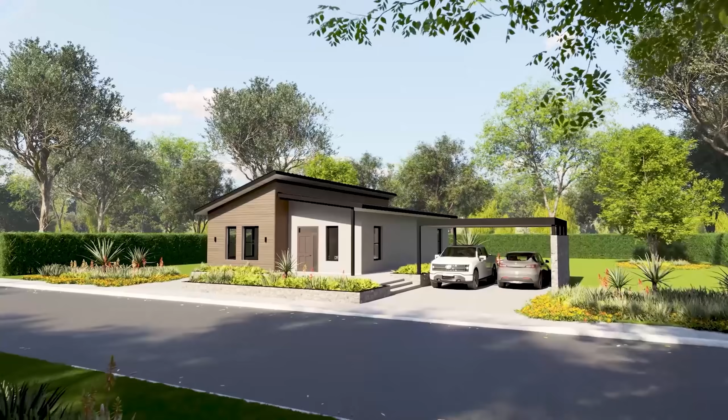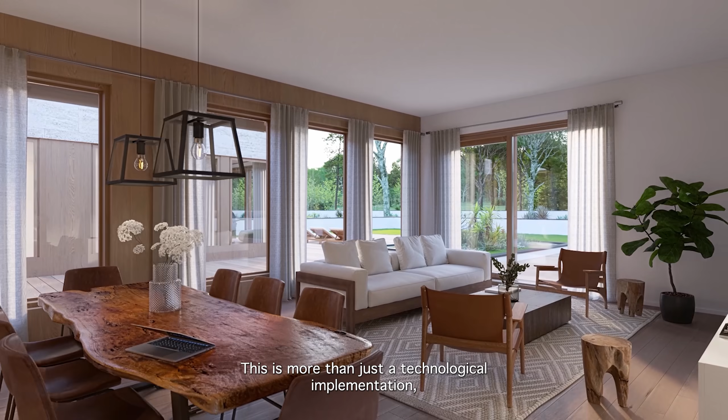I think ADMARES is leading the charge of building into the 21st century. It is an actual disruption of the whole market. We will write history with this. This is what we couldn't do a couple of years before. I mean, it's innovative, it's exciting, it's something that you want to own. This is more than just a technological implementation, it's something that is important. It's going to be game-changing.

Our background is in the shipbuilding industry, where large units typically get produced in a very controlled factory environment and then delivered to the shipyard for final efficient assembly.

That made us look at the traditional construction industry, which today still relies on building everything outdoors. A traditional construction site is usually extremely chaotic with many challenges. The biggest challenges being, first of all, you need skilled manual labor to assemble buildings, and we're running out of skilled manual labor in the world. Due to that, the cost of construction keeps rising.

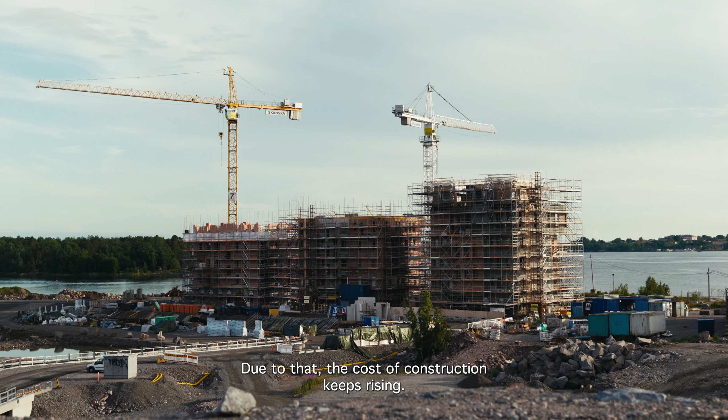On top of it, it's very difficult to control the quality when you build outdoors, because you're always dependent on weather conditions and other logistical challenges. That makes us think, why do you actually build outdoors at all? There's really no benefit. It's just something we've been used to do for the last 2,000 years. So we wanted to completely remove the need for a traditional construction site. We wanted to develop a technology allowing us to build a home in a factory like a product.

Together with our partners now, we spent 8 years on developing the technology, and we today have the technology allowing us to mass produce homes in a factory without the need for any skilled manual labor.

The key metrics for our product are takt time of 22.5 minutes per home, 80% less waste per produced home, while at the same time achieving far superior quality than anyone would get while building on site. And that labor that we have do not need to be construction labor, they can be assembly line operators who we can train in a day.

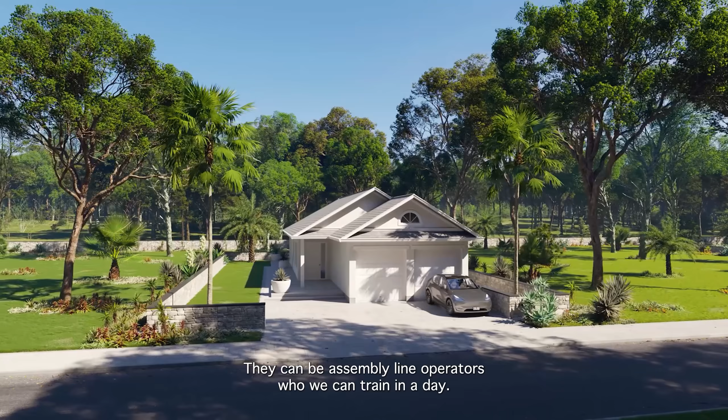Our home being a product is the key discovery in this kind of mindset. Without having a product, you cannot put it in a factory and then you cannot industrialize. That was by far the biggest breakthrough in all of this.

We had the product technology, but we're completely lacking the production technology. We had no clue how to build a factory using automation and robotization. Fairly soon after we tried to design a factory on our own, it failed miserably, so we had to get external help to figure out the production side of this.

Porsche Consulting was actually our first technology partner. Porsche came in and guided us with the concept from automotive industry using the so-called fishbone concept and how we can use pre-assembly and then main assembly and actually get very high productivity and get to a level of mass production. Everything should work smoothly, right?

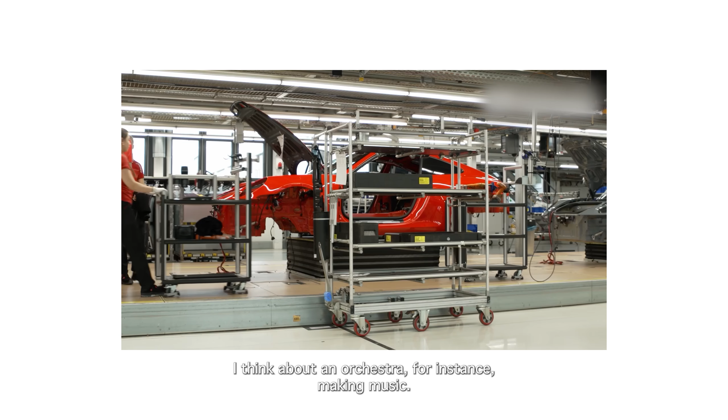I think about an orchestra, for instance, making music. Everything is working more or less in a harmonic environment and rhythm, so to say.

Well, I had this encounter with Michael Hedberg, the CEO. I found his vision very promising and very inspiring, and so we came together.

MHP's role from the beginning has been very clear. They have been responsible for designing the whole digital ecosystem, the whole digital backbone. For me, the catchphrase was that actually ADMARES was willing to build something that is revolutionary. You will have so many different competencies that you would need to introduce, like manufacturing, like assembly lines, like robotics, AI, everything which is coming with processes and organizations and operating models. Bringing that together is exactly our role.

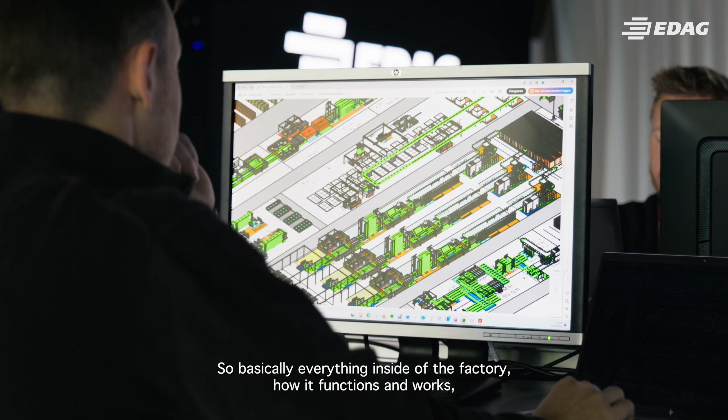EDAG took the concept and designed the whole logistics part of it, production lines and main assembly lines. So basically everything inside of the factory, how it functions and works, is something EDAG has designed. We are acting as the digital and industrial integrator in this project. So we have designed the factory's internal logistics, all the 26 production lines, including the automated main assembly line.

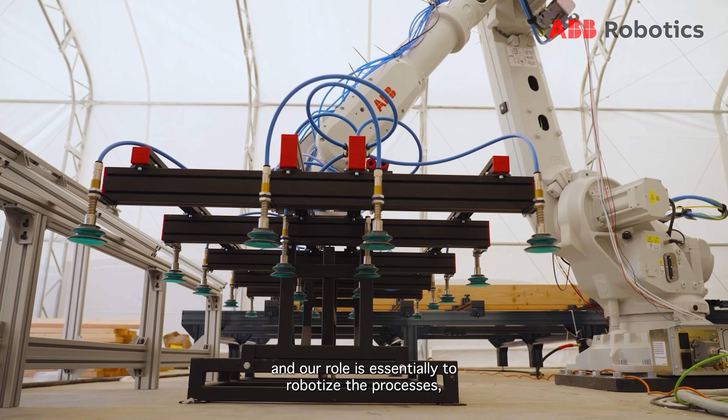We're there to help differentiate the way that home is designed with a lot of our digitalization tools, some of our electrification products, and then we're also going to play a significant role in the way that factory is designed in a digital-first way. We've been making robots for 50 years, and our role is essentially to robotize the processes to drive high levels of automation for precision and repeatability of these systems within the smart factory environment.

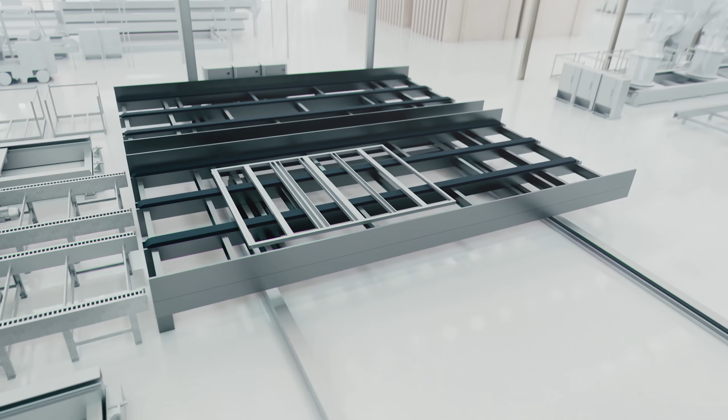The problem that we are solving actually with EDAG and with all the other partners in the project is how do we bring all those different data sources together? Because if you look at it, if you want to build a virtual representation of any kind of environment, the challenge that you still have today is that you're tapping into various different tools, that might not talk to each other. So helping our partners to tap into that with our Omniverse libraries, the SDKs behind and the frameworks, this is the core of what we're providing.

That we're providing to that project. Something that I think is crucial in order to go from PowerPoint into the reality is the logic of technological partnering. When we talk about physical AI today, there's not going to be one player who's like, and here is the solution to any kind of intelligent machine or intelligent home or intelligent production. This is an ecosystem play because there are so many ingredients.

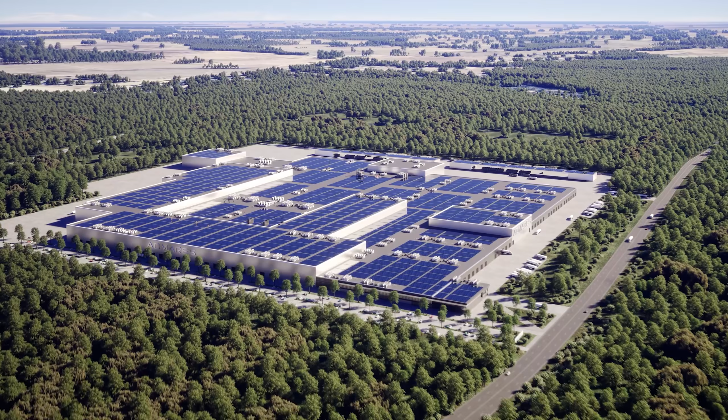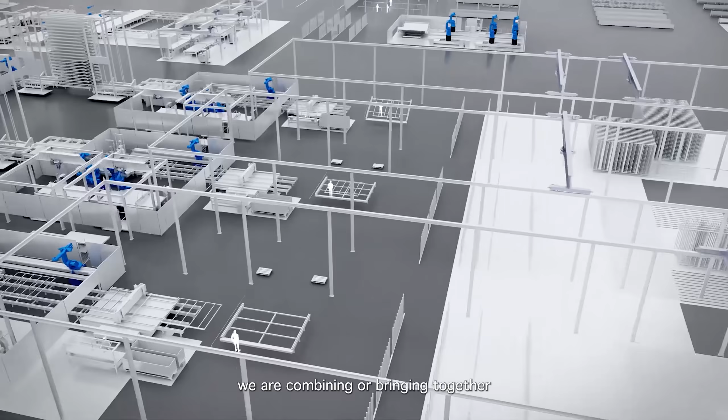EDAG, in cooperation with Siemens and NVIDIA, started to build the smart factory in a virtual world. Using our industrial metaverse platform METIS, we are combining digital twins, virtual commissioning, simulation, physical AI, and industrial implementation in a truly integrated system.

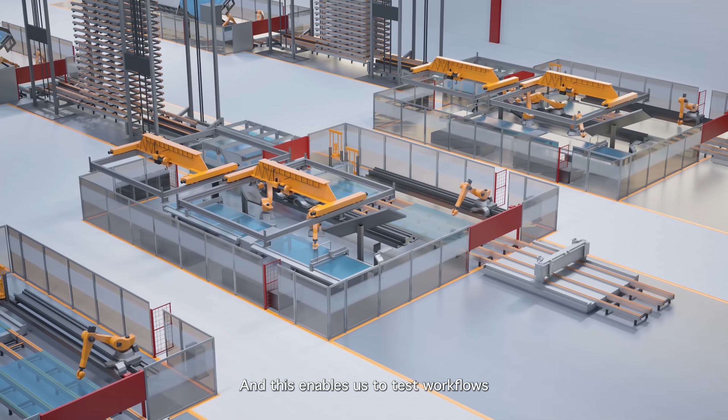This enables us to test workflows, to avoid bottlenecks in the facility, and to confirm upfront that the planned productivity will be an outcome in the physical facility.

This is a very big digital play. We're able to actually simulate and validate the factory, that it actually works and creates the productivity and takt time that we have planned before we even build the factory.

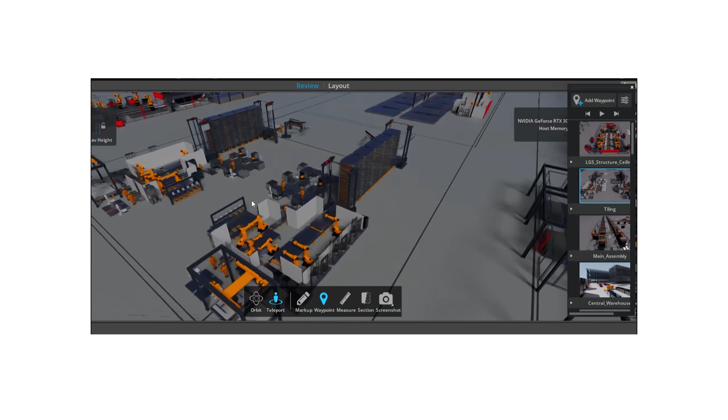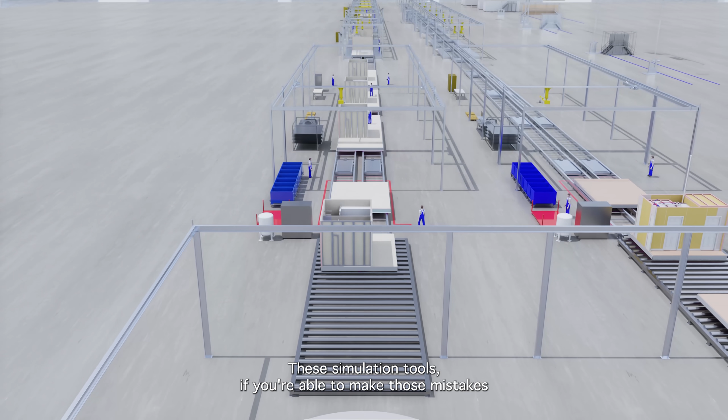It's really painful to build out models in the real world and make mistakes in the real world because it's very expensive - from concrete to steel to equipment. These simulation tools, if you're able to make those mistakes in a virtual environment, you can make as many as you want, you can iterate on that, you can anticipate, you can interpolate. There's so many things that you can do in a virtual environment.

You're not guessing at how it's going to work out. You absolutely know it's going to happen.

When you lean in on digital twin use cases for the design of the home itself, the benefit is in the homeowner that has access to the data, right? You've got a home that's speaking to you. You have a manufacturing environment that's speaking to the home.

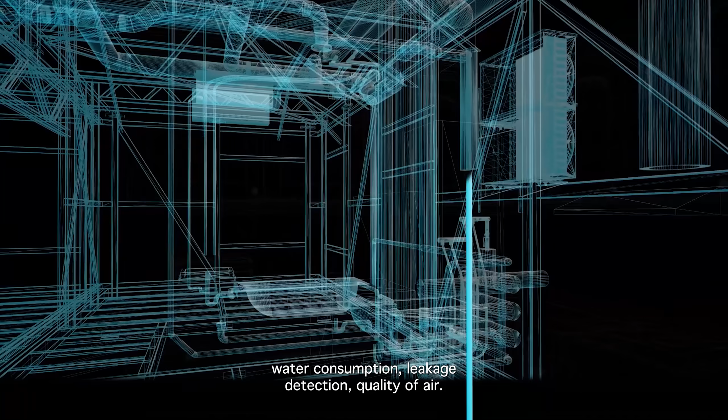Traditionally, homes are black boxes. We don't really know how they're performing. With our smart home platform, we're actually able to monitor energy consumption, water consumption, leakage detection, quality of air, and every single equipment is connected to one platform that is simple to operate through your smartphone or displays in the wall. For the first time, we'll actually have real-world data and know how homes are performing.

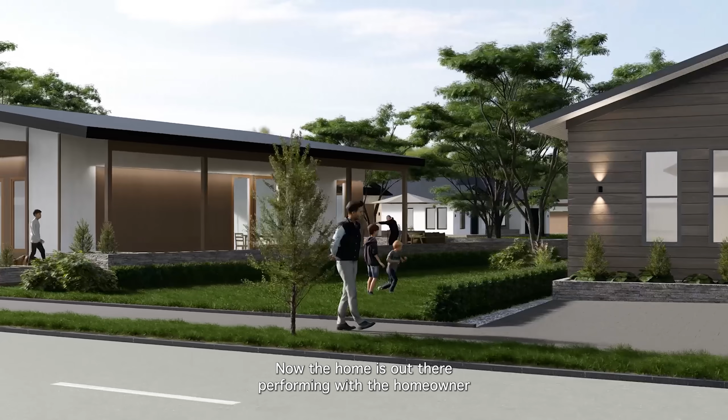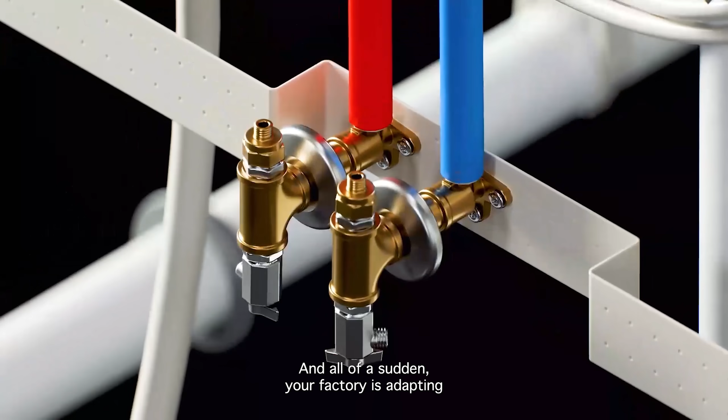Now the home is out there performing with the homeowner, and it's feeding data right back to the manufacturing environment, and those engineers are looking at that data and they can make intelligent decisions about future design products. All of a sudden your factory is adapting to the design changes of a home.

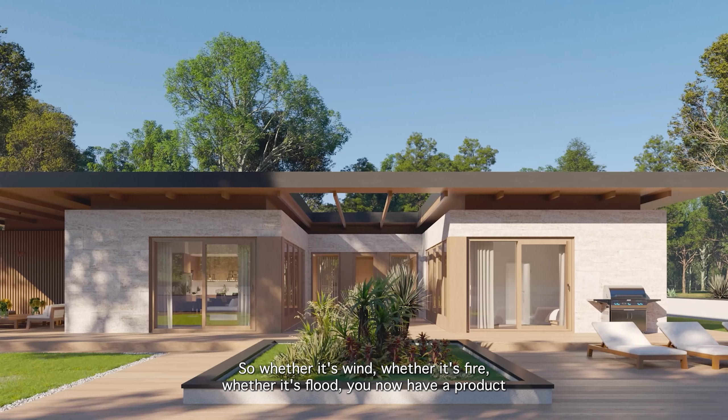From a community standpoint, unfortunately, we've got weather patterns that are extremely challenging. So whether it's wind, whether it's fire, whether it's flood, you now have a product that is more sustained through those challenging times because it is a stronger home, it is a smarter home.

We're also very excited that our technology makes a big difference when it comes to sustainability. We're reducing CO2 emissions by 75% and waste of material by 80% when comparing to traditional construction.

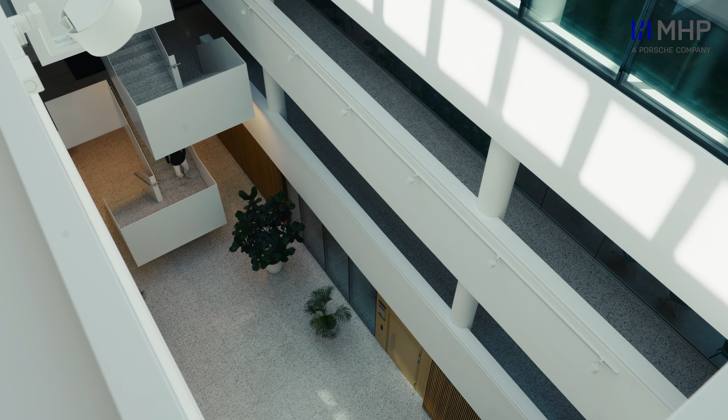This is more than just a technological implementation, it's something that is important because the people are waiting for housing, and therefore we need to implement and speed up the deployment.

It's not really a country-wise or a site-wise issue, it's a general issue. Population is rising. We have a shortage all over the place. Wherever we find people, they are struggling with the same thing.

Think about Australia right now needing 1.2 million homes by 2029. That's a massive social, economic challenge that many countries are facing.

To be able to solve that problem is something I think we should take a lot of pride in. This is a huge contribution to society, a huge benefit for all the customers. Now it's time. It's really time to realize that.

It's interesting that it took this long for construction to follow what all other advanced industries have already done, but we've done it now and we're getting the benefits of industrialization.

First of all, you get the cost down, which we believe is the most important thing in order to be able to create affordability of housing again. Secondly, we're able to build at scale. In order to start affecting the housing shortage, we have to start mass producing.

We're able to do that now. And thirdly, we're not making any compromise with quality. Since we're putting it in a high-quality, automated and robotized factory, our homes are actually of highest quality.

This is a technology that will finally start affecting the global housing shortage, providing very high-quality homes at affordable prices. Together, we're not just building homes - we're actually transforming one of the largest industries in the world and making housing affordable again in the process.